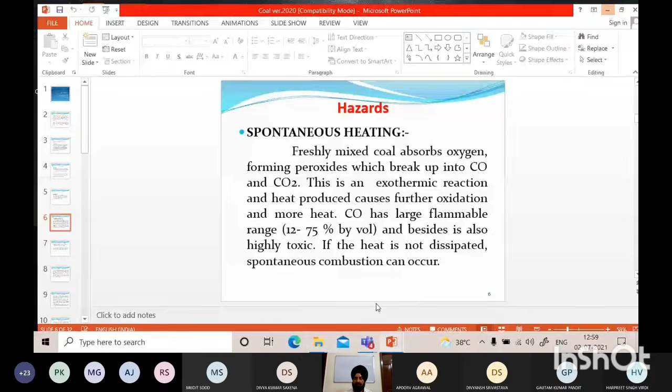Okay, so today what we have done so far was the bulk cargos, preparation, IMSBC, BLU code. I hope all of you got the notes.

Yeah dear, all of you can hear me? Yes sir, so we got the notes sir. Okay very good, we'll continue with this.

Again, there is a topic on coal concentrate. Coal is a very frequently asked question in your written papers, so please study this or pay attention carefully. It's very simple. For every cargo, what we normally cover is what are the hazards associated with that cargo, preparation before loading like hold preparation, what all we are supposed to do, how we will go about it, and even inspection. As a duty officer, if you are starting the cargo, you should broadly have in mind what to check. And for coal, after loading, during the transit, what all we are supposed to do, what we are supposed to check.

Both from examination point of view, from answering your question in writtens, even going for orals, because coal is a commodity which is heavily imported by India, of course also by a lot of other countries, and accidents are taking place. So MMD surveyors go for investigation, inquiries, and they find a lot of things which are not followed. So please, where safety is concerned, first thing is knowing. If I know what are the hazards, what are the dangers, then only I can take precautions. If I don't know, then a big problem comes.

So let's see coal. Australia is the world's largest coal exporter, an estimated 240 million tons exported every year. And even other countries like US, Canada, South Africa, and major coal importing countries like Japan, Korea, UK, Germany, India, basically for power generation. We also know everywhere we have thermal plants, so coal is required for this. We need the power, we need the electricity for our daily needs.

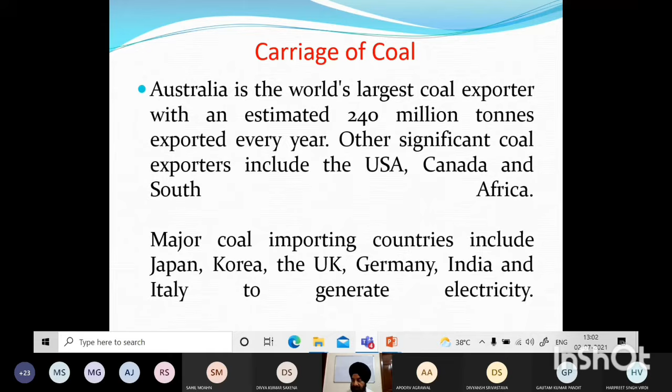Now, there are basically 4 categories of coal. First one we call coal slurry, which is like a powder form. This is like a byproduct when coal is mined and taken out from the mines, so naturally a little powder will come out. This mixture of solid coal containing water is obtained as a byproduct during mining, and coal particle size is less than 1 mm, it's like a powdery form. But this particular type of coal is dangerous.

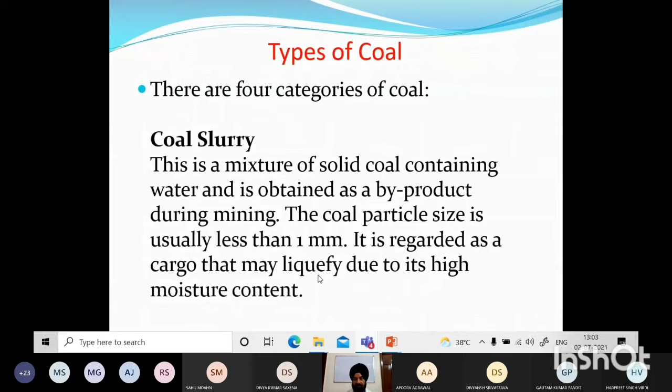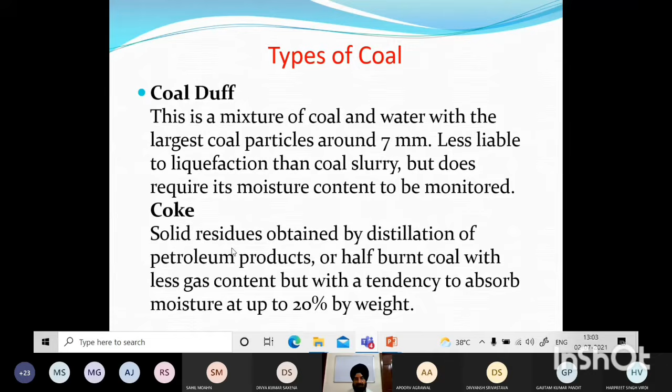We have seen liquefaction - it can liquefy due to its high moisture content plus it being in a powdery form. Other types of coal you have seen in big lumps: coal duff, coke. Their size is a little bigger, and even if they have moisture, it trickles down to the bilges. So that's the idea - we keep monitoring the bilges daily, and as soon as we find water, we keep pumping out. Coke is the solid residue obtained by distillation of petroleum products, half-burnt coal with less gas content. The fourth is again your small coal, likely to develop a flow state due to its high moisture content. So if the coal is small in powdery form, there is a chance of it becoming a flow state, otherwise this moisture trickles down.

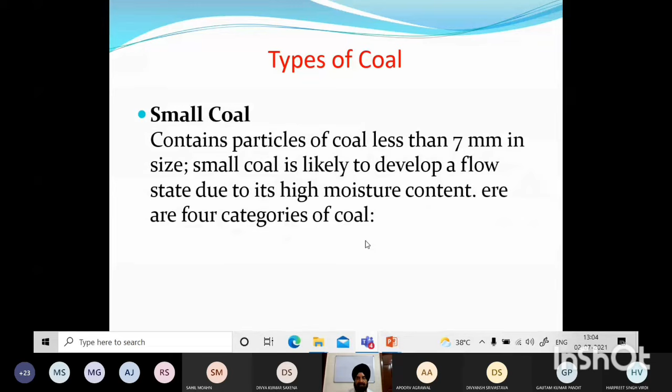Now let's see what are the hazards of these coals - you may have briefly read about this before. First thing is spontaneous heating, heating on its own. Now, when it is lying in the open, you will ask why it is not getting heated - because in the open, when it is lying, there is a lot of natural ventilation, natural air is passing, so it keeps getting cooled.

But when we are loading it and keeping it in an enclosed place, in a hold, we close it, so there is no continuous flow of air. And freshly mixed coal absorbs oxygen. So this coal which we have loaded into the hold absorbs oxygen from the atmosphere, forming peroxides, which break up into carbon monoxide and carbon dioxide. Both gases - of course carbon monoxide is a very dangerous, fatal gas.

Now, when this reaction is taking place, it is just reacting with oxygen from the atmosphere. This reaction is exothermic, meaning a lot of heat is produced, which causes further oxidation and more heat. So you will find that slowly the cargo starts getting heated up. At the same time, CO, carbon monoxide, has a large flammable range, and besides being flammable, it is toxic also.

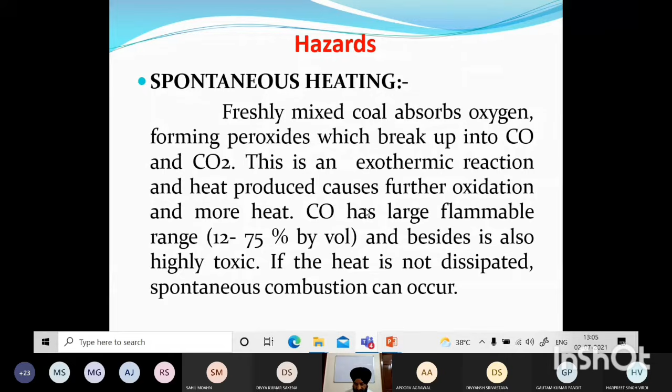If the heat is not dissipated or taken care of, spontaneous combustion can occur. If the cargo starts heating up, there is a limit and combustion can take place. Oxidation, of course, depends on the surface area available.

That's why we have a tendency that we don't want the cargo to be broken into small pieces if they load it from a height. If it breaks into small pieces, there's more surface area, more oxygen absorption, and more heat generating inside the holds. Hence, breakage of coal into smaller pieces while being loaded is to be prevented.

So you can't do much, but as a duty officer, what you can do is be in touch with the terminal fellow, foreman, supervisor, whosoever is there. They also take care and know the initial briefing time, so you can also ask him that he should not load the coal from a height, isn't it?

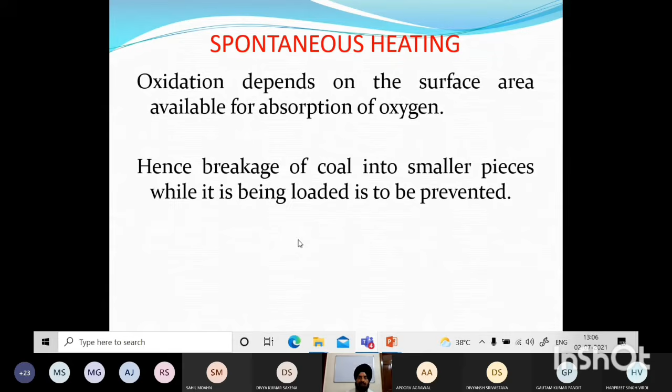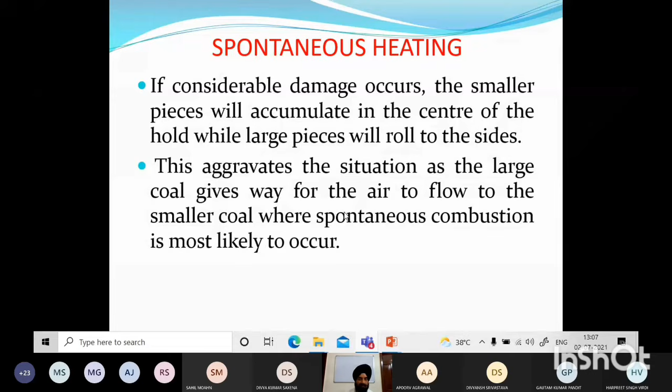If considerable damage occurs, the smaller pieces will accumulate in the center of the hold, while larger pieces will roll to the sides. This aggravates the situation, as the large coal gives way for air to flow to the smaller coal, where combustion is most likely to occur. So the first danger is spontaneous heating, mixing up with air, reacting with oxygen, and forming monoxide with self-heating taking place.

Now, second danger is emission of methane. Certain cargo or certain coals have a different property. There are different types of coals - some are liable for spontaneous heating, some for emission of methane.

Now, methane gas, I think everyone knows, is flammable and dangerous when it mixes with oxygen. It can immediately ignite if even a little bit of spark is there.

So coal emits methane gas particularly immediately after loading and when newly worked or freshly broken - it means it is freshly mined. Methane is a flammable gas, and when mixed with air forms an explosive mixture.

Now you can just imagine you are carrying coal in the hold. All the hatch covers are closed, and if this gas is generating inside, with oxygen also in the atmosphere, that hold atmosphere becomes flammable. Now any small spark is needed, and it will give a solid explosion.

Secondly, methane is lighter than air, so it will accumulate on the upper portions of the hold. And even if sometimes your hatch covers are leaking, it may come out on deck and go into the mast houses, crane houses which are next to your holds.

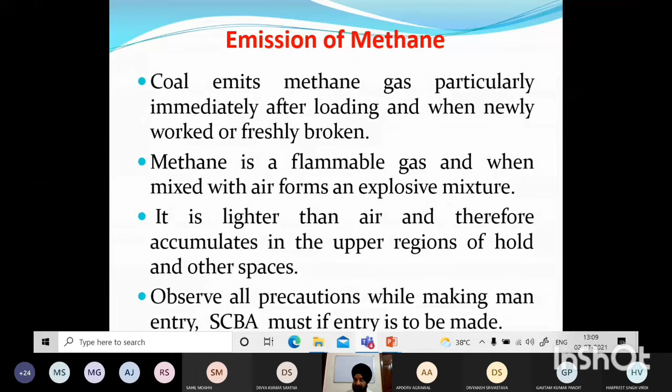So now, of course, your days as cadet are over, but now you're going to be a duty officer. When you are duty officer, make sure that nobody goes or does something like that. You are in charge, so politely instruct your team that if anybody is going anywhere, you should know it.

Now, corrosion - the third danger or hazard with coal. The coal left over from earlier mining was dumped into freshwater ponds, so there is a lot of moisture in this coal - that's normally how it's done. Even sometimes water is sprayed on this so dust doesn't fly. This type of coal gives rise to high temperature from self-heating in the presence of moisture and sulfur.

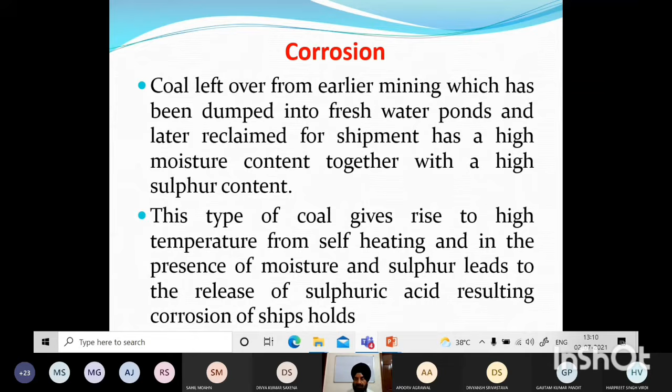It leads to release of very diluted sulfuric acid, but this acid will definitely corrode the steel. So you'll have pitting taking place on the tank top, inside the bilges, bilge wells - which is not a good sign. The solution is that we keep pumping out if we know there is a lot of acidic water in the bilges, basically to avoid damage to our holds and bilge wells.

So we do this pumping out regularly, and even the engine room has a kit so they can check the concentration of acid in the bilge water. So you can estimate that there is going to be some sort of corrosion.

Now next is liquefaction. I think we have studied enough what liquefaction is, but liquefaction is possible only with coal slurry or very powdery coal, not with lumps. In this case, with moisture, the cargo migrates to the surface due to compaction and vibration, resulting in the development of a flow state.

And if you are loading this type of cargo, we have to check the TML, transportable moisture limit - that cargo does not contain moisture higher than what is permitted.

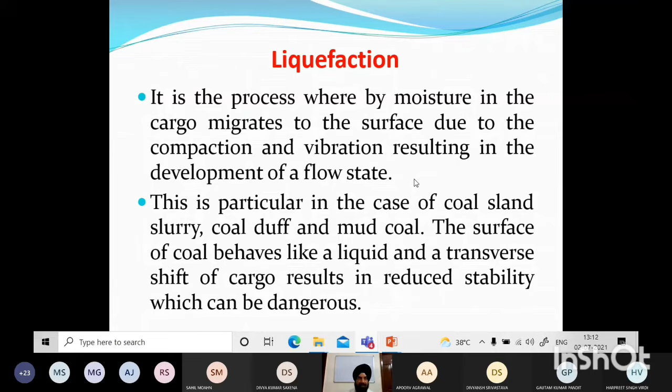Otherwise, of course, the top surface can become like a fluid and it is dangerous for the ship.

Now the next topic is precautions. What all precautions? Hazards, basically - fire is a hazard, corrosion, spontaneous combustion, emission of methane, which can cause fire and corrosion. So all these things, and liquefaction for powdery or slurry coal.

Now what do we do? How do we carry this coal? So, general precautions for carriage. First thing is the cargo information.

That what type of coal is this - is it methane emitting coal, or this coal is liable to spontaneous combustion or heating. So in the IMSBC code, because this book is there, so everything is given in detail.

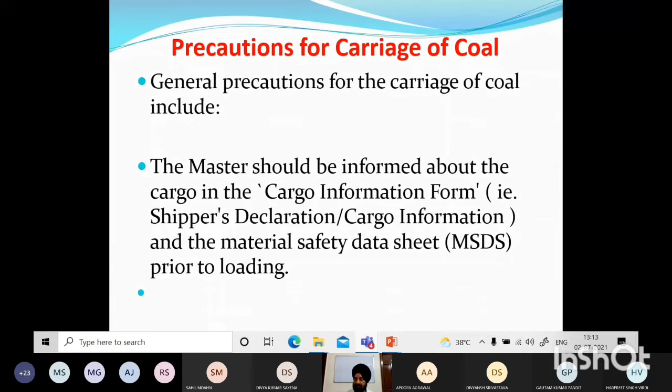So while on the ship, of course, the chief officer goes, he studies, he may make you aware, but otherwise also, as a second officer, I should also know, isn't it? That what all precautions I am supposed to take. So precautions that need to be taken depend upon the information.

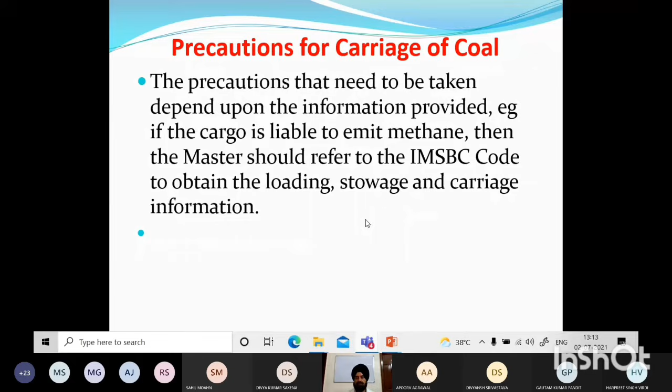Coal is liable to emit methane - IMSBC code, obtain the loading, stowage, carriage information, ventilation. So these are the very important things which are in your IMSBC, a very user-friendly book, in the cargo schedule, appendix 1 if you go. So it's written in detail.

Now, before loading - again preparation, inspection - just see that these are the very broadly main things what we will see. We have seen this, how we will prepare the holds. But again, for your answer in the question paper, when you are writing, so we have to write this.

Whenever I have to prepare the holds, I make sure bilge wells cleaned, residual cargo removed, suctions tested, and then it is covered. So the bilge cover is again covered with burlap or Hessian cloth so that only the water can go, but no cargo or powder goes in, which can block the bilges, and then we cannot pump out.

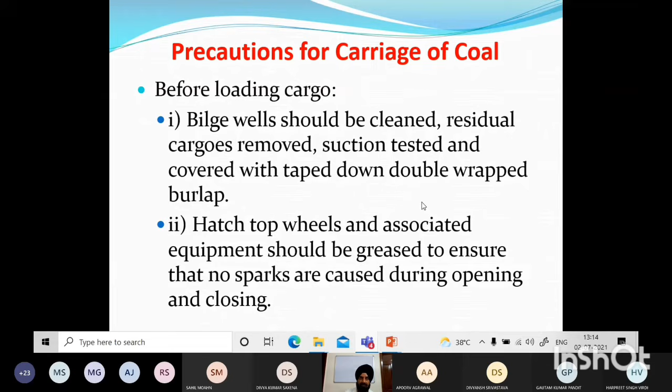Hatch top wheels and associated equipment should be greased, because there is a possibility - when we are opening these bulk carriers' side rolling hatches, hatch covers - if the wheels are just sliding, not moving, there are chances of spark, and coal can have gases like methane, which can catch fire.

Electrical cables, cargo hold lights, other equipment within the hold should be checked for insulation damage. Normally bulk carriers don't have this lighting system, but in case if it is fitted on your ship, the best thing is to switch the power off from the main switchboard.

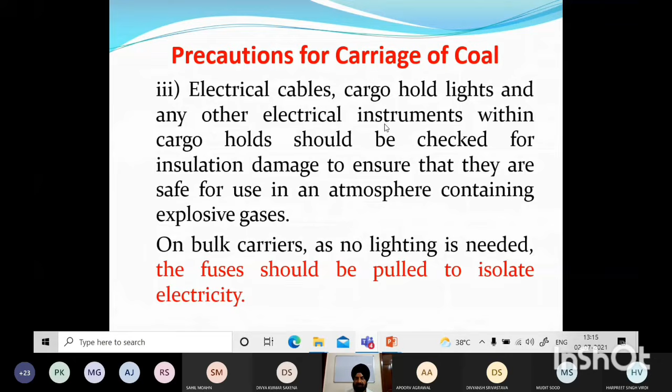So no need, because we don't need this. And whenever you come even on the loading and discharging terminals, these gantries who are using the grabs, there is enough lighting, so there is nothing to worry about the lighting. So best thing, in case you have it, switch off from the main breaker.

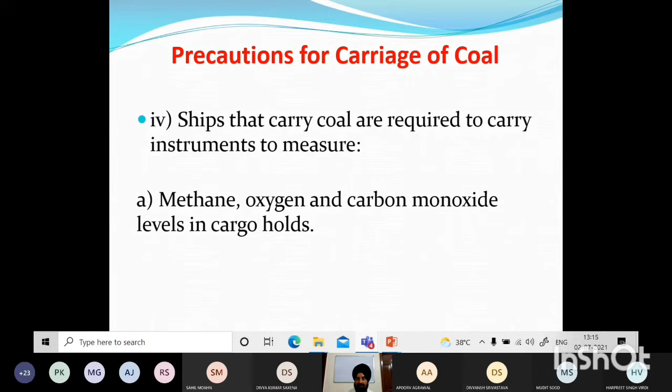Again, certain instruments - you have checked the hold, they are clean enough, bilges are cleaned, covered up, no damages, everything is in good order. And then we have to see that we have these instruments also. So of course we must have worked with the chief officer, and when you join the ship, you know that for methane, oxygen, carbon monoxide, just to check the levels we have the equipment - explosimeters, oxygen analyzers.

I don't know how many of you have used these, but of course the boys who have worked on tankers, they must have used all the equipment, and for that you know the precautions - calibration, that it is giving you the correct readings. Then to check the hold temperature, which is also a daily practice at sea, two or three times you check the hold temperature. So we need thermometers.

There are permanent temperature pipes with a cap on top, so you can check the temperature in the forward and aft part of the hold with these special thermometers. They are basically covered in a steel conduit, so that when you are lowering them, they don't get damaged in the temperature pipes.

pH of the bilge water - again the engine room has got a kit, so they can analyze if the water is acidic, so that can inform you. Otherwise also, whenever the water is getting filled up, the bilge is getting filled up, we keep pumping out, of course keeping MARPOL into mind.

And installation of these instruments or taking measurements should be possible without entering the cargo space. Not that somebody sends you, or you send somebody, to check the temperature, and he goes, opens the hatch, and then goes inside. No, there are temperature pipes permanently fitted.

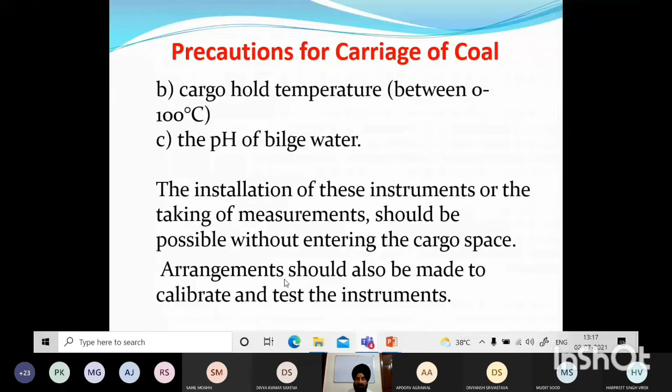As I told you, like a sounding cap, you have the caps, and you just open the cover cap and lower the thermometer. You can note down the readings. And again, arrangements to calibrate and test the instrument should be there.

Coal should not be stowed against hot bulkheads. Extra monitoring should be implemented when coal is loaded in holds adjacent to hot areas.

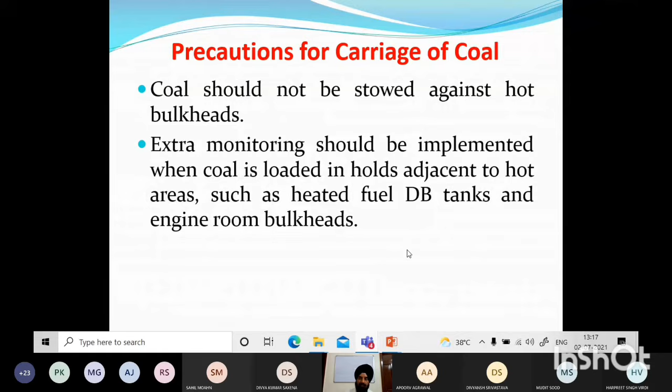Sometimes you have double bottom fuel tanks, and the engine room heats up the oil for transferring. There we have to be careful that the temperature doesn't go very high, so heat up only as much as is minimum required. Sometimes engine room bulkheads, the last hold which is common with the engine room side, are insulated so heat doesn't transfer to the hold side. But again we have to consider the type of ship and its construction.

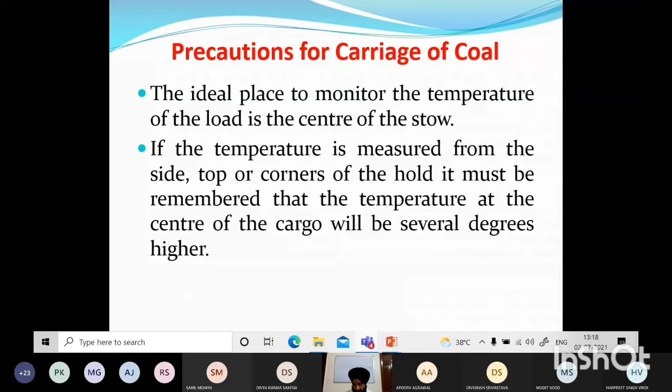The ideal place to monitor temperature is the center of the stow, but you may not have a pipe there, otherwise it would get damaged during loading and discharging. So if temperature is measured from the side, top, or corners of the hold, it must be remembered the temperature at the center will be several degrees higher. Normally we keep a record at forward, aft, port, and starboard, wherever the temperature is taken, and assume the center will be slightly more, since more exposed area can lead to more spontaneous combustion and heating there.

No smoking policy is one of the biggest precautions, not only for the ship's crew, who all know this, but also for shore people who come to load and unload. There you have to put your foot down and take measures - first, put a no smoking board near the gangway. Like on tankers, we write everywhere 'no smoking, smoking not permitted,' so most shore workers see it. If you find any shore fellow smoking, ask him to stop, or inform higher authorities, because it can cause danger to everybody.

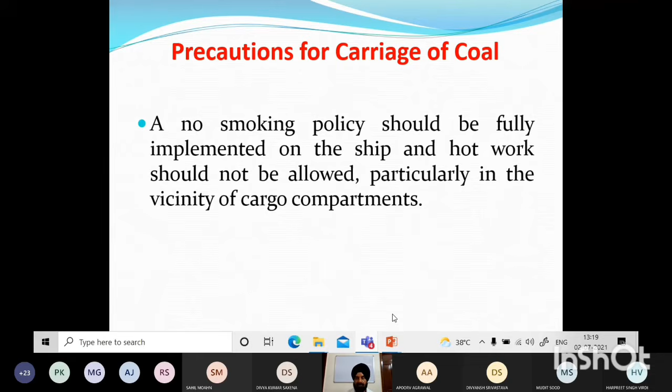Now comes ventilation - these are the precautions during transit. After loading, we keep checking temperatures morning and evening with instruments, and then there's ventilation - how it should be done, because introducing more air means more oxygen, which can lead to more spontaneous heating.

But it depends on what type of coal this is. If more spontaneous heating is taking place, or it's possible that self-heating is not occurring but there's a lot of methane emission, then we can do surface ventilation just to remove the gases.

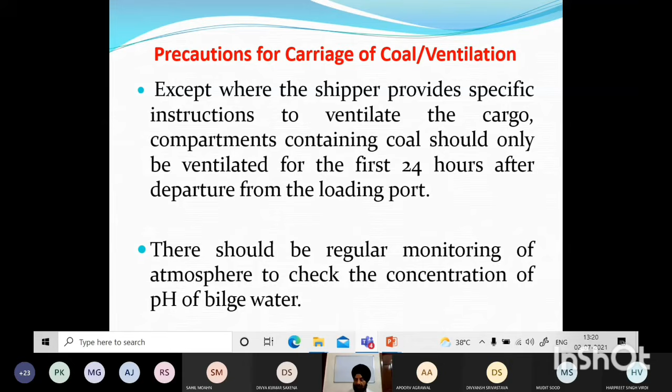Except where the shipper provides specific instructions to ventilate, cargo compartments should only be ventilated for the first 24 hours after departure from the loading port, and then we close and seal the holds. There should be regular monitoring of the atmosphere to check pH concentration, and we keep checking for presence of methane with instruments that give values - what level it is, and whether it's increasing or remaining steady.

Ventilation should only continue if methane levels rise above acceptable limits, and should be used only for removal of gases - surface ventilation, not through ventilation. The hold should also be ventilated prior to discharge.

Discharging requires its own precautions. During transit we've taken care, checking temperature and methane levels so the cargo doesn't heat up. When we reach the discharge port, before opening the hatch covers, we don't go immediately - as I told you, there are side-opening hatch covers, or hydraulic folding types, where there's a possibility of sparks being generated.

It's best advised to do a little ventilation prior to opening the hatch cover, just to remove the gases. Sometimes the hatch cover is opened just a little bit to let natural ventilation take place before fully opening it.

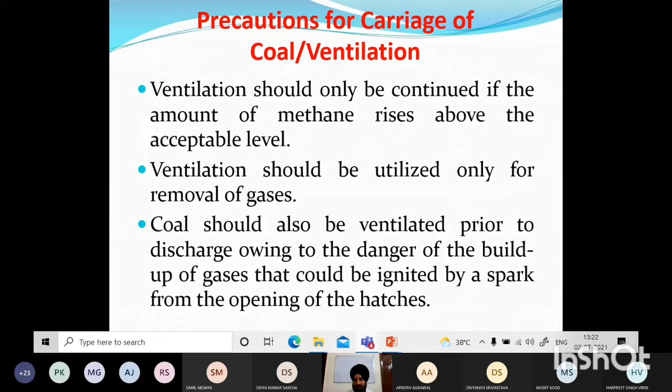Gases may escape the cargo compartment into adjacent stores, mast houses, and so on - so it's not only the holds. On these ships you have to be careful whenever doing any job, because the forepeak store or other mast houses may contain these gases. It's a good idea to check with meters for presence of such gas.

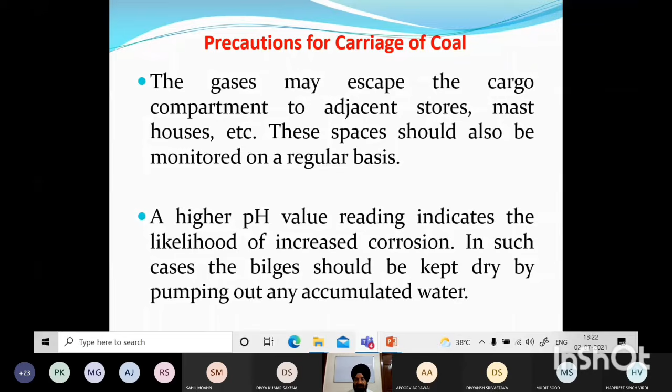Also, higher pH value reading indicates likelihood of increased corrosion and acid formation, so bilges should be kept dry by pumping out accumulated water - this is another way to save the holds from deteriorating.

However, we keep records, because if there is an excessive quantity of water, there can be a slight difference in the cargo figures. So the chief officer keeps a record any time bilges are pumped out on any ship, noting how much water is coming out.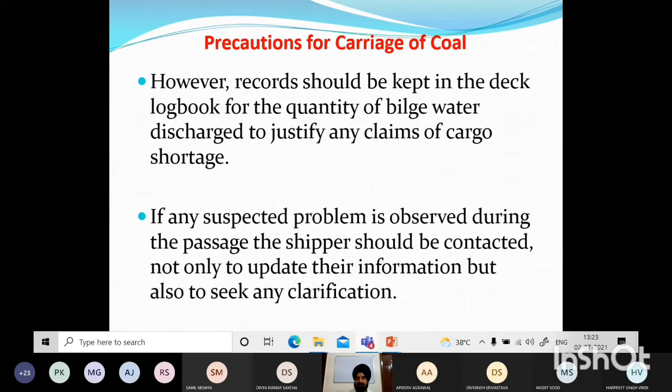Not only update the information, but also seek clarification if instructions are unclear - we have enough books to consult. If the shipper has declared the cargo liable to emit methane, we look at the lower explosive limit (LEL). Following additional precautions should be taken where there is presence of methane, since the atmosphere could be flammable, requiring extra precautions on deck.

सर आपकी आवाज आनी बंद हो गई। सर आप अटक गए। ठीक है।

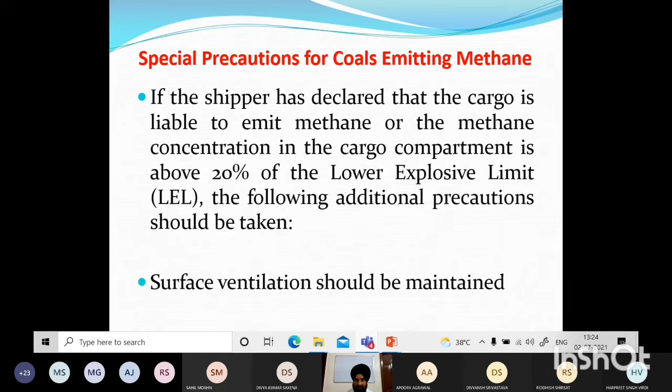Until gases have been removed, should be opened carefully. ये सब तो हम करेंगे। सेल्फ हीटिंग कोल्स के लिए, if the shipper has declared cargo is liable to self heat, then again we should seek additional guidance on adequacies of existing precautions, and analysis of the atmosphere of the cargo compartment basically indicates an increased carbon monoxide concentration.

If either methane is increasing or self heating reaction is taking place, so there will be more and more CO being generated, so the level of that gas will go up. So we have the instrument to measure that also. In case you find the level of CO going up, it gives a good indication that the cargo is getting self heated.

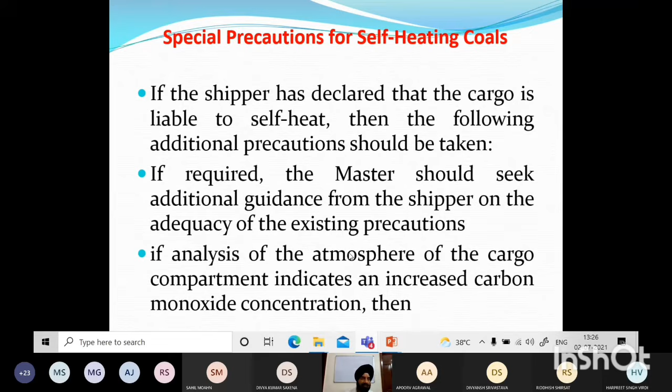And again we are monitoring temperature also. So what we can do is only the cooling, isn't it? So we can just keep the deck hatch covers closed so that the temperature doesn't rise enough. Hatch cover should be closed after loading, additional seals applied, and surface ventilation should be kept to minimum, and carbon monoxide concentration should be regularly measured and recorded.

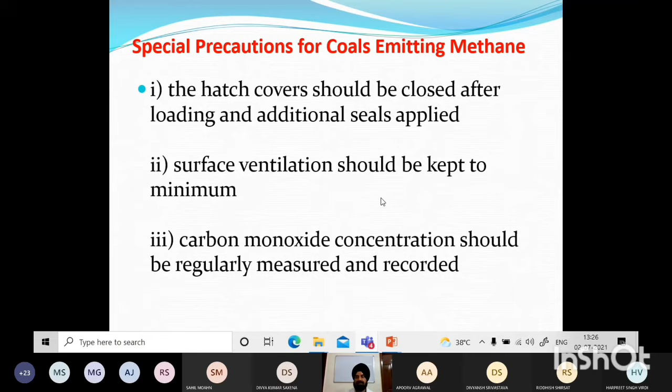So the best thing is a total sealing up, no air going inside, so that will basically not let this self-heating go up. And if the hold temperature exceeds 55 degrees centigrade or carbon monoxide concentration rises steadily, then expert advice should be sought. So this is also equally important, that we have to be careful the temperature should not exceed 55.

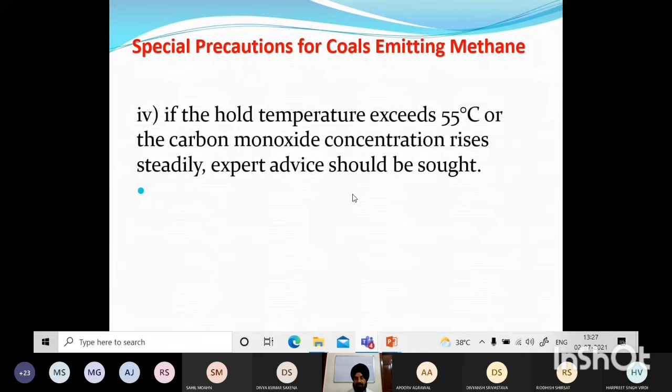So this is how basically your coal fire looks like. Suddenly you open the hatch, some spark has taken place or there was a flammable atmosphere, the coal was heated enough so it can catch fire.

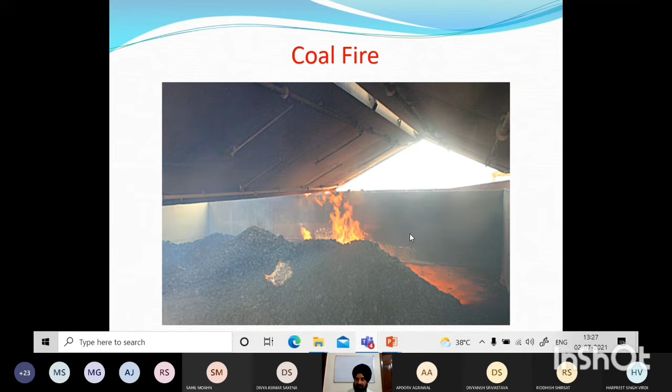Now to fight these coal fires, if there is evidence of coal burning, the space should be closed, ventilation stopped and sealed against entry of air. Boundary cooling to be carried out at sea, no water or steam to be applied directly to the coal.

So you got to be careful, as the coal reduces the water to hydrogen and forms carbon monoxide, both flammable gases. So introduce CO2 or inert gas, whatever the system the ship is fitted with, and best is to seal the hatch covers. Fire will die on its own death. So this is important for the coal fire.

Okay, so this is basically regarding your coal hazards preparation. You have studied the whole preparation and you have plenty of points to write for the whole preparation, and during the transit regularly monitoring of the temperatures, hold bilge level, and the levels of these gases, methane, CO, and ventilation if needed to be carried out, only surface ventilation to remove the gases.

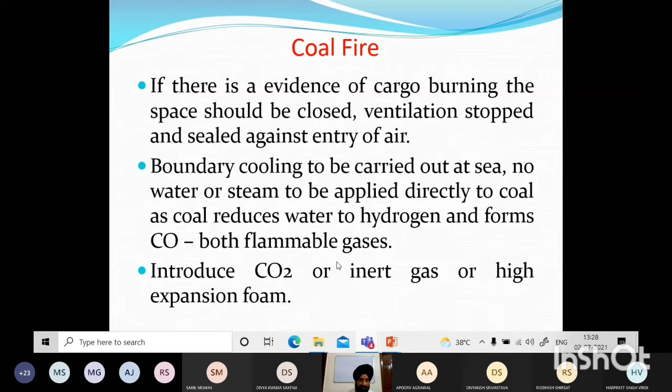That's all, so this is most important. और इसके साथ ही हम थोड़ा सा देख लेते हैं about the concentrates। तो ये तो था आपका coal का, and now high density cargos. Coal is also not so high density as compared to other ores you load.

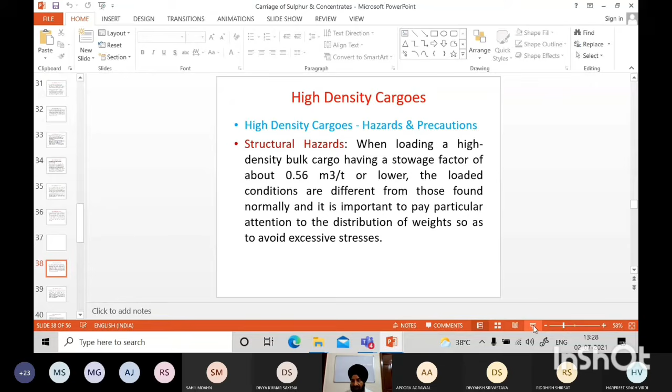So high density cargos, when we are loading, so उनके साथ क्या क्या problem है। High density cargos basically, which we have seen yesterday when we were discussing IMSBC, structural hazards. Now structural hazards are when loading a high density bulk cargo having a stowage factor of 0.56 meter cube or lower.

The loaded conditions are different from those found normally. So it is important to pay particular attention to the distribution of weights. So high density cargo में सबसे पहली precaution is the structural hazards।

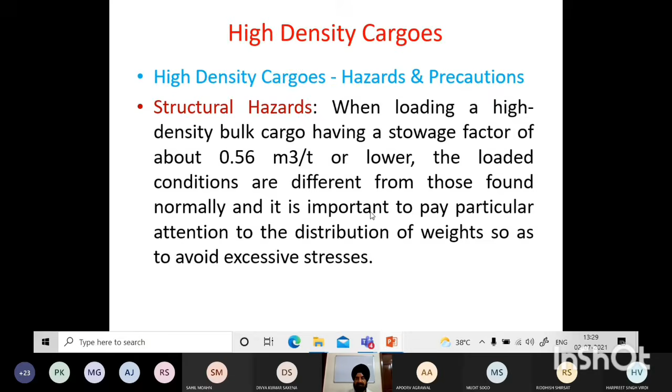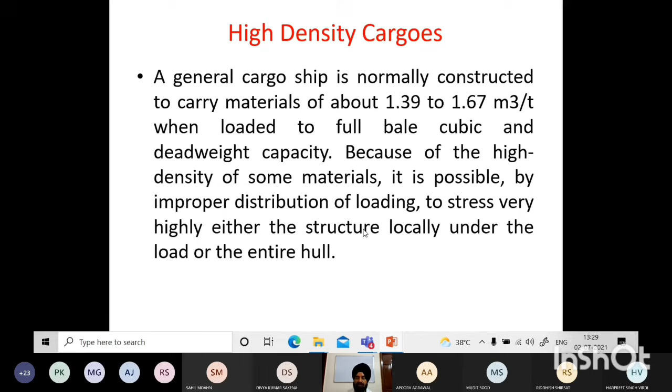And your normal ship is normally constructed to carry materials up to a stowage factor of 1.39 to 1.67. But because of high density of some materials, it's possible by improper distribution of loading to stress very highly either the structure locally under the load or the entire hull. So high density cargoes में सबसे पहला is the structure, check the distribution. Stability hazards also can be there.

Initial GM very high, because you have loaded high density cargo which is just at the bottom of the ship covering only maybe a few meters, the entire hold is empty. So you have very large GM, which will cause basically excessive rolling, isn't it?

So cargoes occupy very less volume, that's why the center of gravity of the cargo is very low. And as a result, आपकी जो GM है, that will be excessively high. So your ship will be what we call a stiff ship, with violent movement. So this is also not good.

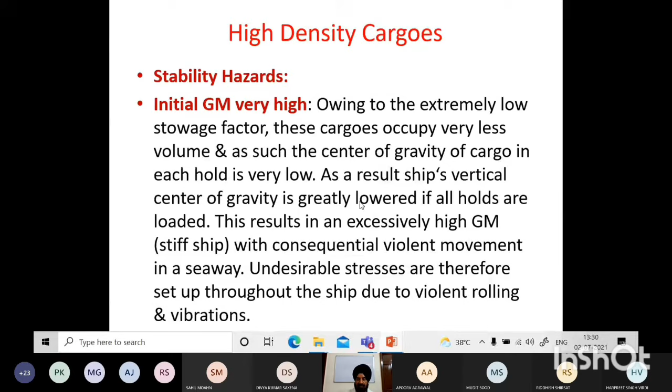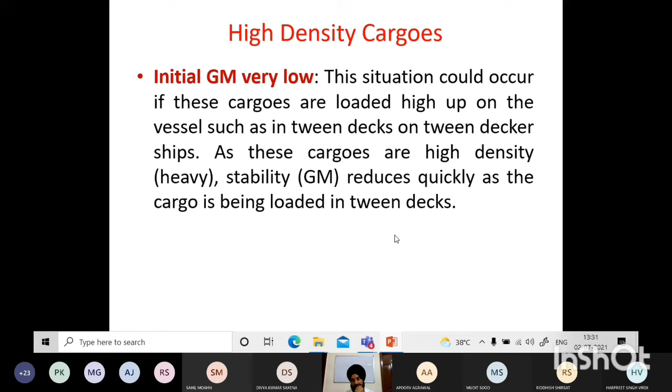It can cause a lot of stresses on the ship, or it can be that initial GM is very low, but normally this is not the case. In case you are loading cargo or high density cargoes on the tween decks, then it is possible. But nowadays, of course, we have these specially designed bulk carriers which have no tween decks, just one complete hold. The possibility of GM being high is very much there.

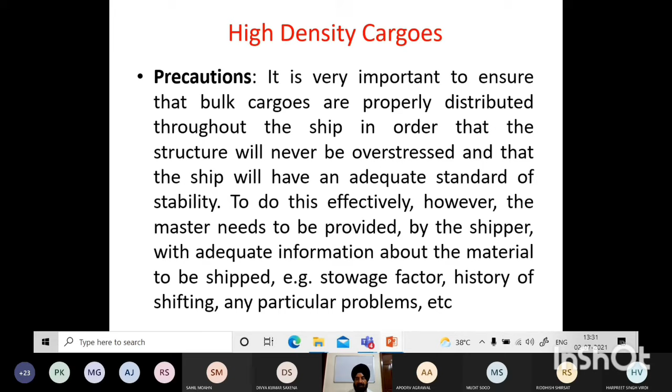Now precautions for high density cargoes: to ensure bulk cargoes are properly distributed throughout the ship so the structure will never be overstressed and the ship will have an adequate standard of stability. To do this effectively, there is a lot of information from the shipper - adequate information about material, stowage factor, history of shifting, any particular problems. Otherwise, we have the IMSBC books also to consult.

They also give you a lot of guidelines to prevent the structure being overstressed. Again it is up to the chief officer when he is doing the planning. So of course you see your load indicator, but if you do equal distribution as given in the loading manual, there is never a problem.

So here the requirement is that yes, the captain or ship staff should be provided with the loading information. When you come for the chief officer's course, you will see what a loading manual is, what information is inside it, to arrange the loading on board the ship so as not to overstress it, and should be guided by the loading information provided in the ship's stability booklet also.

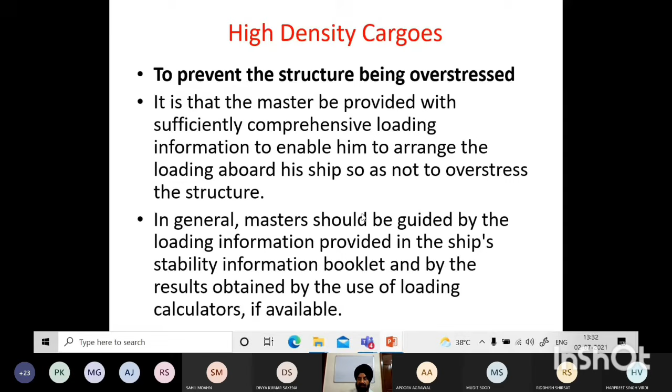There also, worked out conditions are given. So you can make out what is the best condition or how much your GM is when you work it out. We take precautions accordingly - cargo should be loaded as uniformly as practical throughout the hold to reduce local stresses.

Sometimes trimming can reduce stress if you have a pile in the center of the hold, since definitely all the weight is coming only on that area. But if you trim it and spread it all over across the hold, then the stresses are basically distributed.

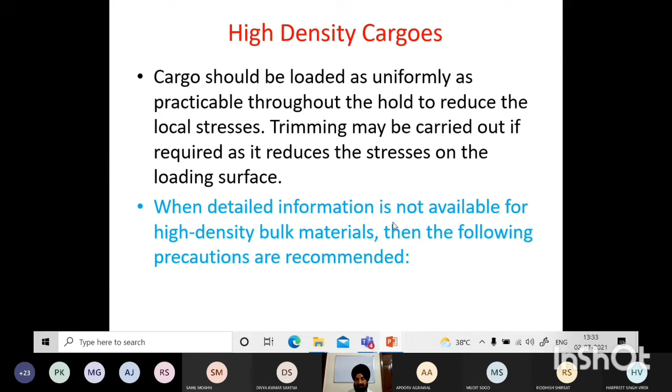Now they say when detailed information is not available for this high density material on cargo ships, which are now very rare - but sometimes on a cargo ship this type of cargo, high density cargo, is to be loaded in one or two holds - the general fore and aft distribution of material by mass should not differ appreciably from that found for general cargoes. And the maximum number of tons of material loaded in any cargo space should not exceed 0.9 LBD.

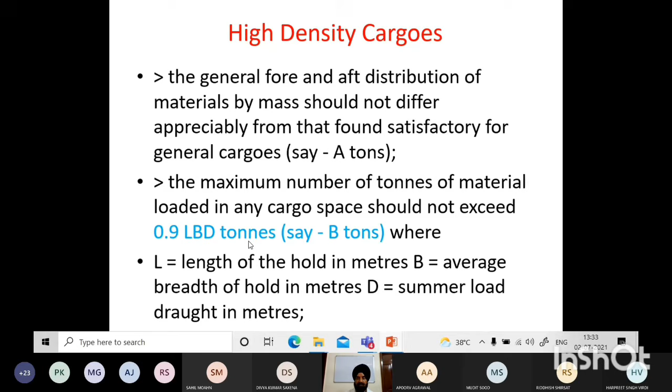So here L is the length of the hold, B is the average breadth, and D is the summer draft. So we know the maximum quantity, so many tons, we can load if we do not have any information. Only if you have information, then there's no problem, we can decide - the ship's loading manual has got a lot of information. Otherwise we apply this formula.

So where material is untrimmed or partially trimmed, the corresponding height of the material pile, if loaded like in the center of the hold above the cargo space floor, should not exceed a certain limit. In case you have a cargo loaded in this condition which you may not be able to trim, the height of the pile should not be more than 1.1 into D into stowage factor, where stowage factor is given in cubic meters per ton, and D is again your summer draft.

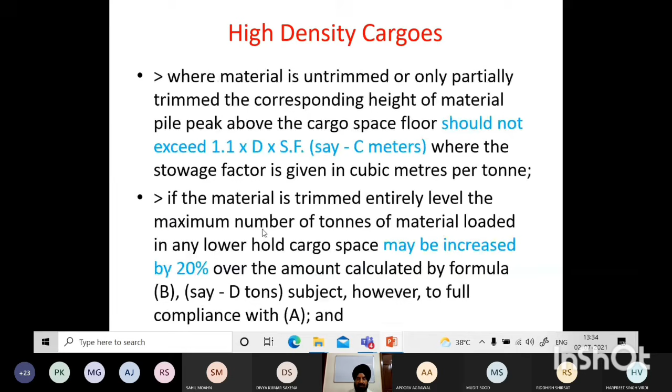So if the material is trimmed entirely level, the maximum number of tons of material loaded in any lower hold cargo space may be increased by 20%. So once you've distributed the weight, you can increase by 20% the amount calculated by formula B, that's 0.9 LBD - we can increase by 20% if trimming is done.

And now, because of the stiffening effect - some of these cargo ships used to have machinery space in the center, and naturally the shaft is passing through, and if there is a shaft tunnel in the hold - of course nowadays you don't carry small consignments of cargo, but this is coming from old times - in case your hold has got this type of shaft tunnel, then only 10% in excess you can load.

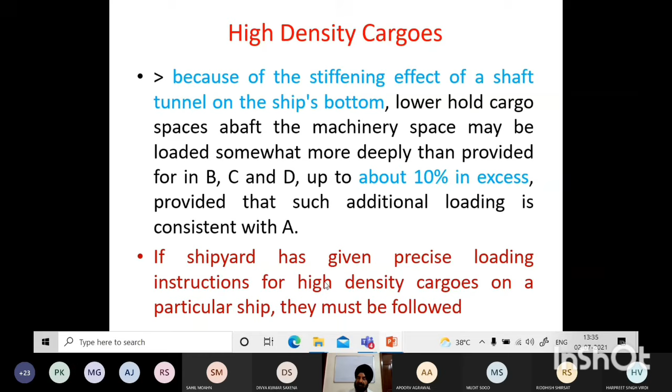But basically for today's ships, when you are loading these high density cargoes or concentrates in bulk carriers, the shipyard gives enough precise loading instructions for these cargoes in your loading manual and stability booklets. So all the data is given, and to aid stability, a booklet should be provided - that is always there.

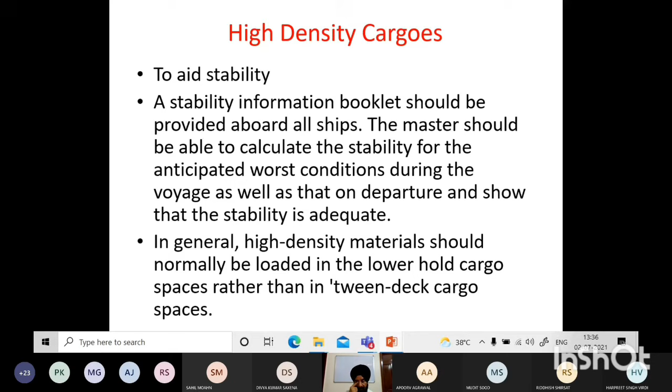And I should be able to calculate the stability for anticipated worst conditions during the voyage. High density material should normally be loaded in lower hold cargo spaces rather than in 'tween decks. So you can write this - that yes, in case you have a general cargo ship type with a 'tween deck, we prefer to load only in the lower hold.

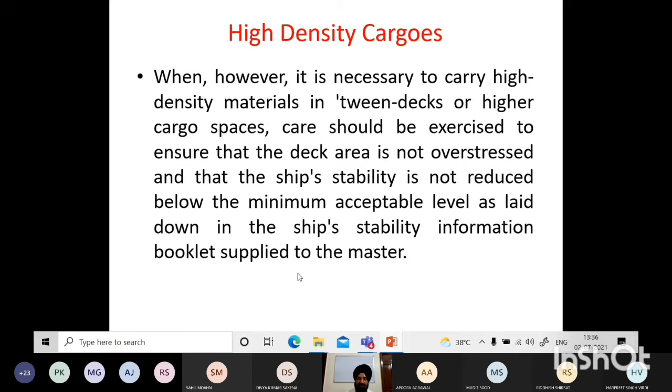So 'tween deck, I won't stress much on this. Whenever we are transporting this material, the consequences of excessive GM should be known. Sometimes bulk carriers, just to reduce GM a little, do alternate hold loading, but that is possible only if the ship is strengthened to do that.

Alternate hold means you leave one hold empty, load in hold 1, leave number 2 empty, then 3, 5, 7, 9. So naturally the cargo quantity in loaded holds will be more and the cargo will be quite higher up compared to if you distribute the cargo in all the holds. So you have to check in the books that the ship is designed for this type of alternate hold loading. That is for bulk carriers.

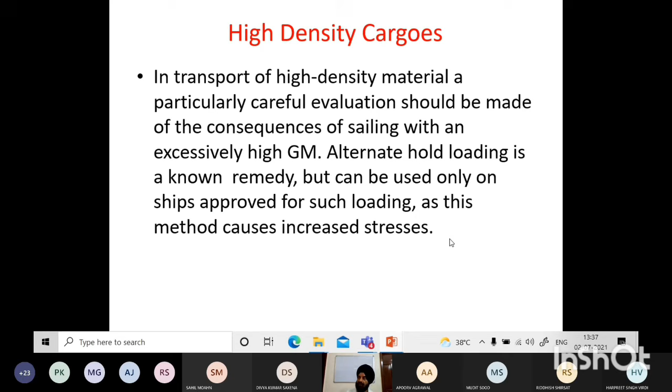Sometimes I have also done this; some ships are strengthened enough. It has its own advantages - you can save cargo hold cleaning time, and GM also is effective. You are comfortable, the ship is not rolling violently.

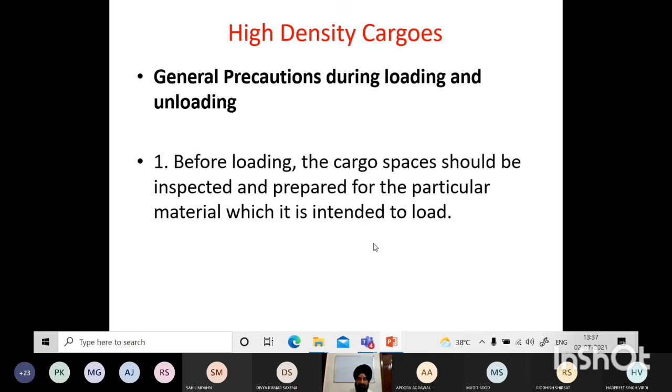So for high density cargo, general precautions before loading: cargo space is inspected and prepared for the particular material, and ensure bilge lines, sounding pipes, and other service lines within the cargo space are in good order. Also, because of the velocity at which some high density bulk material is loaded into the cargo space, there is a possibility of damage. So initially we should load this cargo at a slow rate and from a lesser height - not that the loader is at his peak and dropping cargo onto the tank top. Steel is steel, it can get damaged, or any other fittings can also get damaged.

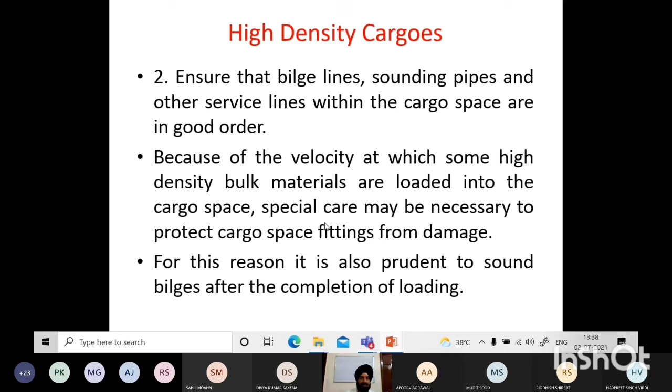That's why we always say that after loading, check the bilges to ensure no water is coming in and no cracks or damage has taken place. Attention is particularly drawn to bilge wells and strainer plates, especially prepared to facilitate drainage and prevent entry of materials. This is our whole preparation - covering up the bilge covers with burlap or hessian cloth.

Also, most of these bulk cargoes have dust, so it is good practice - normally the chief also does this - to cover up all the winches and other things where dust can accumulate. You also put the AC on internal circulation, so the air conditioning system for the accommodation doesn't suck in all this dust.

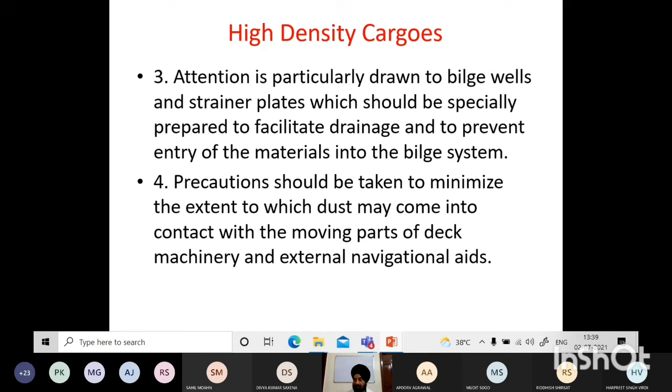A problem can occur there too - any moving parts of machinery or winches where you have done greasing, this dust will go and catch on the grease, causing further problems. On bulk carriers, you have canvas covers and all that, so you prepare beforehand and cover up these areas. This is an additional precaution when loading this type of cargo.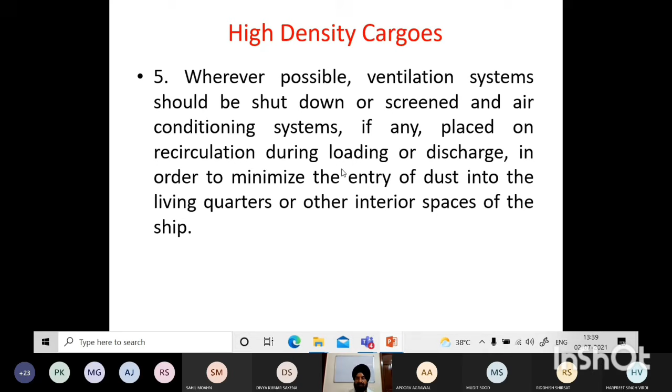When they are loading at a very high rate, ballasting or deballasting sometimes becomes a problem, so we have to ensure the deballasting rate keeps up. As you've seen in the BLU code, there is a checklist with an initial discussion that in case it goes out of synchronization - they start loading too fast and we cannot deballast - then we ask the terminal to slow down or stop. Because once the cargo is loaded, you may not be able to take out the ballast, and then the cargo loading amount will be short. That's a problem we don't want to land up in.

So these are the problems with high densities. I'll send this to you as well - please go through it. And sulfur - sometimes they ask you about sulfur too, so go through those notes and read about its properties. All these bulk cargoes have hazards and dangers that are almost similar to most of them.

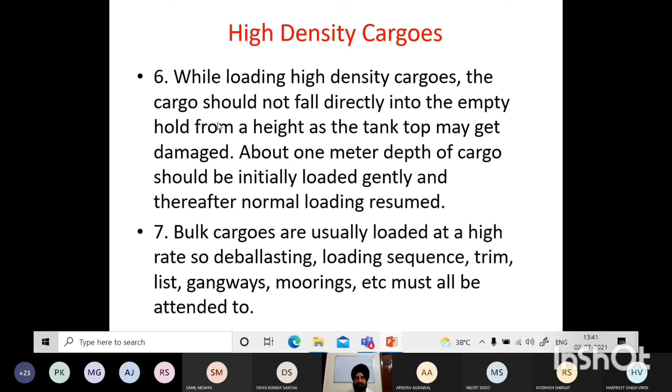That's all we have. So any questions, anything not understood? I hope it is easy.

So coal, high density cargoes, concentrates - these are very common questions at your level, along with hazards, preparation, and precautions during transit. Read this once or twice, understand it, so you can write it in your own language. But please, when you answer, it should be very clear that...